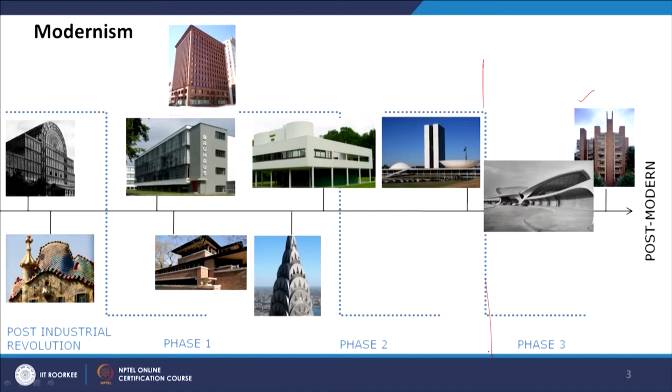So tensile and shell structures, brutalism, and metabolism are all post-World War architecture styles, starting from the 1950s to the 70s.

During the World War there was a crisis in society, both economic and social, and a war was going on. That's why movements like functionalism and other internationalist movements emerged during the war, with their approach to architecture quite different. Post-World War architecture was very different because the socio-cultural context had changed, the financial structure was different, and the requirements were very different.

We have also seen in international tensile and shell structures, Kenzo Tange's work in Japan, and Japan also started coming into the limelight in this post-World War movement.

Before and during the World War, this movement was mostly confined to Europe and USA, but after the post-World War turmoil was overcome by different countries, it started flourishing all over the world, not just in Europe and USA. Why Japan? Because of metabolism in Japan—after World War II, Japan got devastated.

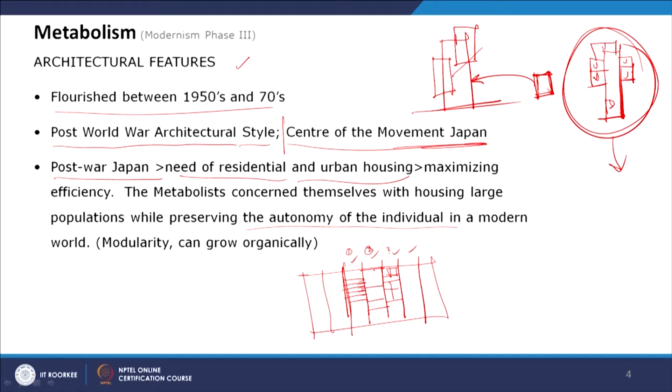Based on the wall area, a user could have many modules arranged in series according to their need—this could go here, that could go there, they could add more or delete a few. The same concept happened in metabolism, as George Nelson described in Tomorrow's House, discussed earlier in the internationalist movement and its corresponding design movement.

This concept which was there at the industrial design level has been translated into the city level and building level. So the same concept of modularity and organic growth can be added, and it can organically grow in a different direction, because the storage wall does not have a fixed dimension. It can be added, and it can also be added on top based on the height of the building. So that was the concept of contemporary storage wall, which we also see in kitchen cabinets designed based on a similar concept.

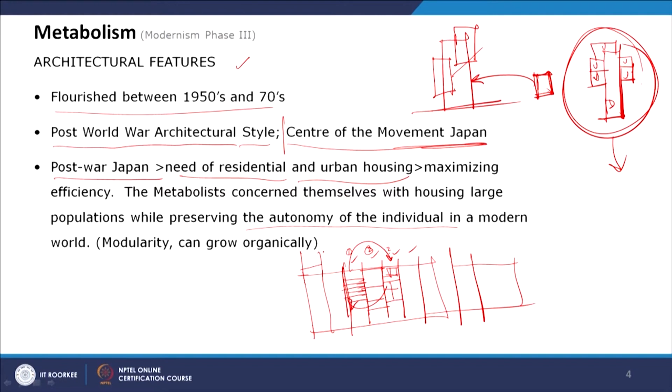So this concept has been translated into architecture by Japanese metabolist architects. The process of metabolism, why did this term metabolism come? Metabolism came from the way living organisms, especially plants, maintain life. The architects got inspired from this process of biological growth.

This concept is called servant and served. In architecture they have divided spaces into two: servant spaces and served spaces. In plants also they have conceptually divided into two spaces. So what happens in the plant? The plant's root and stem are considered the servant spaces.

So what do they serve? They collect nutrition, water, and raw elements from the soil, and then transfer this through the stem to the canopy or body of the plant. The canopy gets all this nutrition, does photosynthesis, and transfers the food nutrition through the total body of the plant. So this is acting as the servicing and transferring element, or the transportation of different elements.

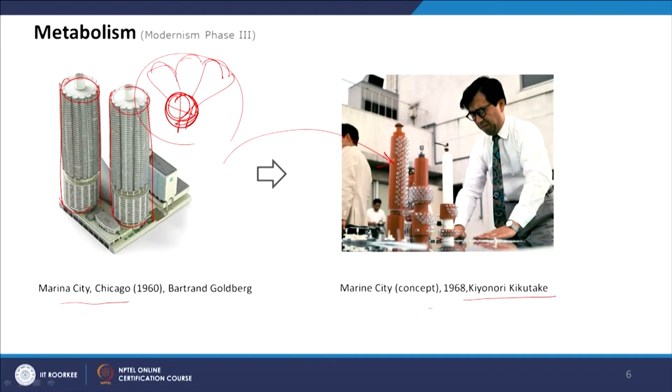The same concept was translated here, and what he is doing in Marine City is more exaggerated, because in some areas there was a punctuation and you see this service core, and from outside these rooms will be added. So sometimes only the service core is visible and the room will be added.

If there is more need, the room will be added over here as well, and it can grow. These cities are connected with this skyline, so you can see this service core is connected to service core. That's why there's a punctuation.

Also this service core, or this horizontal member, will be visually seen from outside, and many times the service core will be just without the cladding. That's why the servant and served spaces will be interlocked with each other through the service cores.

Now based on the need of the user, all these elements are modular, so this can be conceptualized as a modular unit, and then can be joined, or it can also be removed.

But in Marina City this concept was not there, they could not join this way, this modular concept was not there, because Marina City is coming from a totally visual perspective of creating cylinders. But Marine City is coming from a concept of metabolism, where services will be designed, and then served spaces will be fitted into according to the modular need.

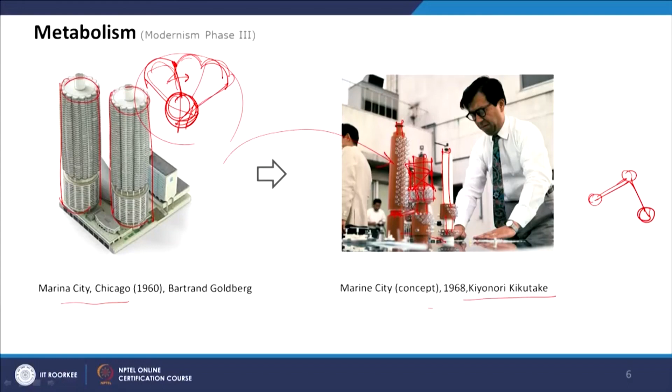So he is using these modular elements to create different change, totally based on the user's requirement. When the user feels like creating more, there is a need from the user side, it will be created. So this is not a fixed design, it can be added, it can be subtracted, and this is dynamic. There was a conceptual difference between these two, but the concept came from Marina City.

From the plan, it looks like this is floating on water, and these service cores are designed, and this service core creates a common space, and these neighborhood levels can be joined with many other neighborhoods, and it can create a city, and it can grow.

This is not just one module where there are services. If you consider this, the servant and served is different. In this module, servant is the service core, and served spaces are the modules around this. So here only the service core is visible.

Now if you consider this, the servant space is this, and these are the modules. So modularity is changing - here the modularity is the smaller apartments, and here the modular unit is one or two floating platforms. These are the modules, and now you add more modules. You can add another module over here, or you can subtract one module from here, and it can grow organically.

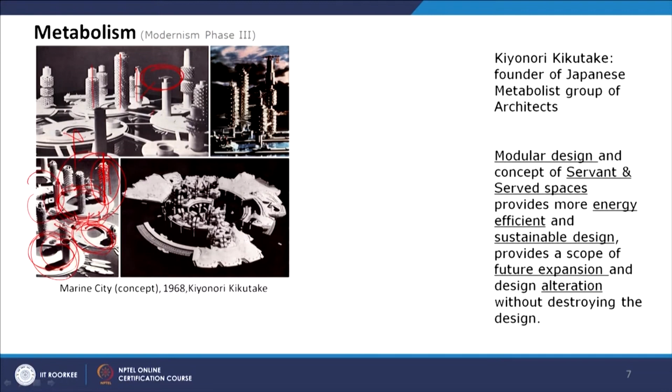So this is modularity added in a different concept. So totally in this city it will look like this, and many other rows can be added. So this is a fluid design.

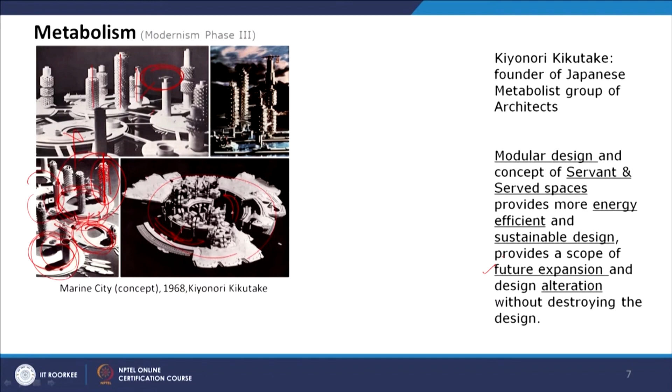Kiyonori Kikutake is also the founder of the Japanese Metabolism group of architects. He is one of the pioneers, and the modular design and concept of served spaces provides more energy efficiency, because there was no requirement to change the services, since that will be designed first, and this is more sustainable because you don't need to demolish the building, you just change the served spaces according to the need of the user. Future expansion is very easy, and the design concept evolved from the future perspective of expansion as well as alteration without destroying the design.

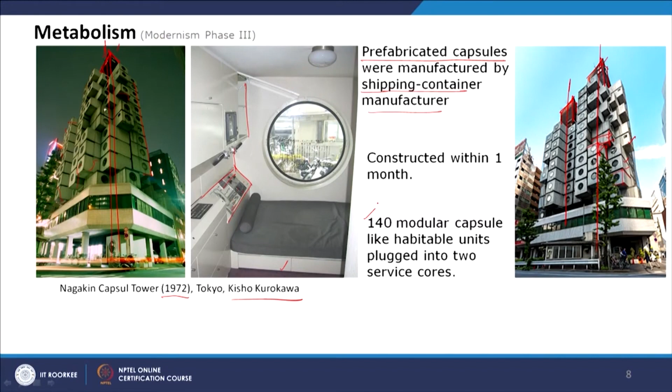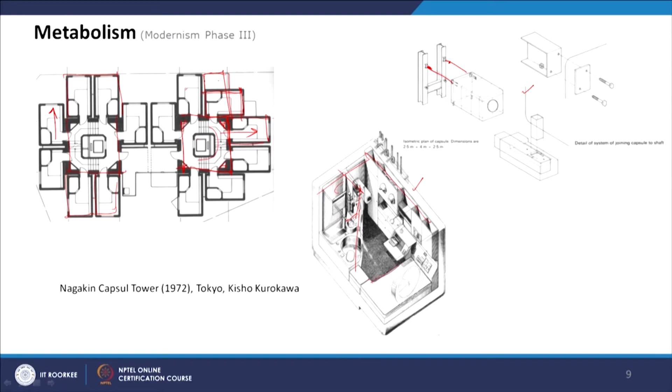The way of adding the module is shown here. This is designed, as we were saying, by a shipping container manufacturer, and it can be snap-fitted into the service core. This is one element of the design, and you can see how much industrial design level treatment was there within the building. The toilet also has a lot of facility in a very small space, and this living area is totally imbibed with the combination of industrial design and architecture.

Another example at a little larger scale is the Yamanashi Press and Broadcasting Center, designed in 1961 at Kofu, again in Japan, by Kenzo Tange himself. Here there are office spaces of 3 different companies, and companies' needs can also change - a company might want to increase their office spaces, or might also sell their office spaces.

And that's why there's a dynamic use, need of requirement was catered to. And then there is a common service core which has 16 reinforced concrete 5-meter dia cores, which contain the toilets, elevators and staircases, which are all servant spaces.

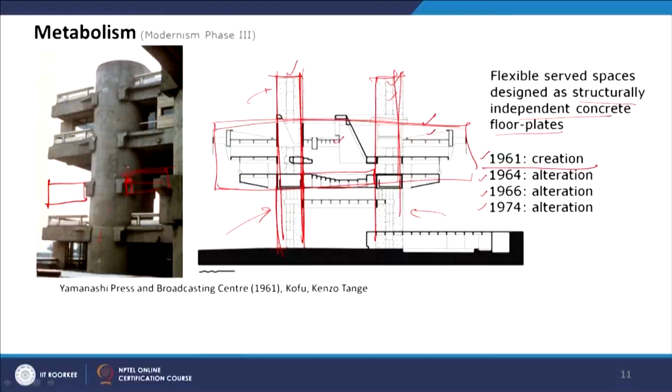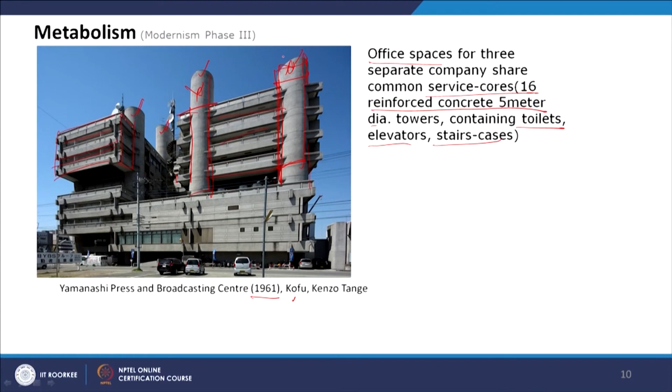So that was also happening in the Yamanashi Press Center. The servant spaces look visually robust, and you don't see any fenestration from here, but here it's like smaller plates with a lot of vertical lines, and they are hanging, looking like they're floating and just hanging from the served spaces. So that looks very lightweight.

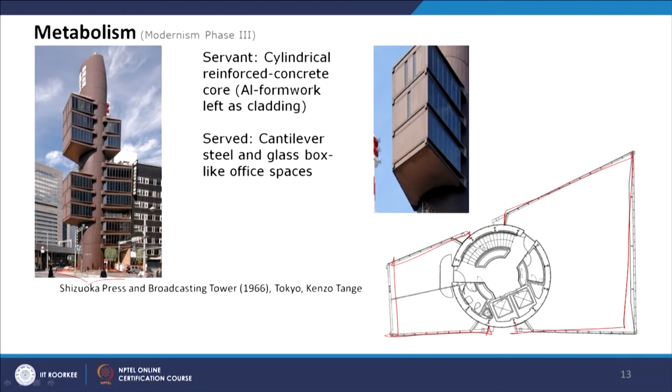That was also the need of Japan—within a very small space, the infrastructure had to be developed. That's why they started blending industrial design and architecture, which we have seen in the Nakagin Capsule Tower. And that's why they could not go for traditional construction. They had to think differently, and went to a shipping container manufacturer and started designing the building with them.

So another example of metabolism is by the famous architect Louis I. Kahn in Richard Medical Lab in Pennsylvania. This image we were showing in the timeline.

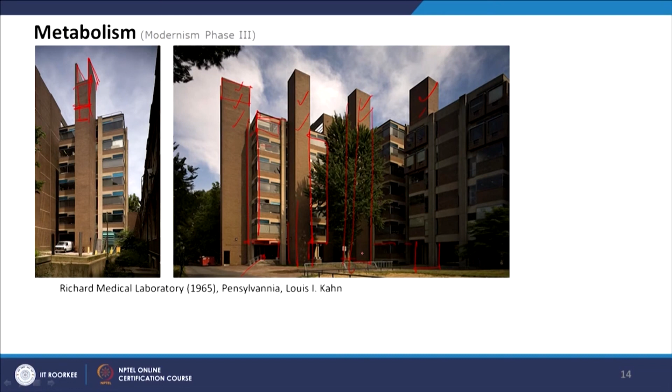So this is a breakthrough building for Kahn, and this design saw the first clear articulation of servant spaces and served spaces, designed by Louis I. Kahn. This has been connoted by Robert McCarter, who said that this is one of the important buildings of the metabolist era. So servant spaces are the independent structures, shafts for ventilation as well as stairways, and these shafts are also for ventilation.

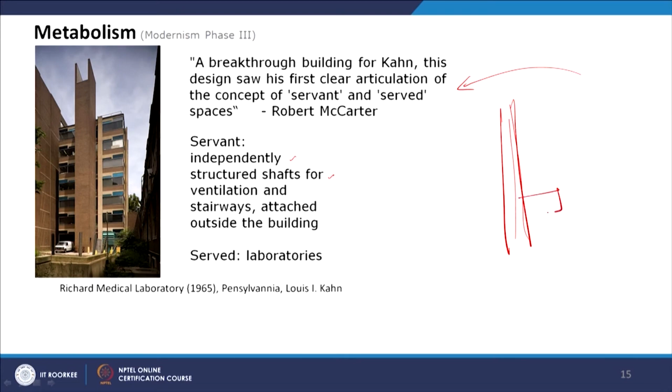So there is a stack effect - if the wind goes from top and there is a void from this room, because of this motion of the wind, due to the Venturi effect, there will be a decrease of wind pressure. Because of the decrease of wind pressure, this wind will be sucked from this void, and from this room all this wind will automatically flow, and the ventilation will be easy. Without this, the mechanical load and electrical load for ventilation will be more.

So it happens automatically if the wind flows from top - we know that the velocity of the wind on top is much higher than at the ground, because at ground level there are a lot of barriers and trees. On top the wind velocity is much more, so if the velocity increases, the pressure decreases, and it will suck the wind from these rooms. That is also a servant space, because this is serving the building for cooling and ventilation instead of just supplying electricity. This is another way of services, so that is also added as a servant space, which is seen from outside.

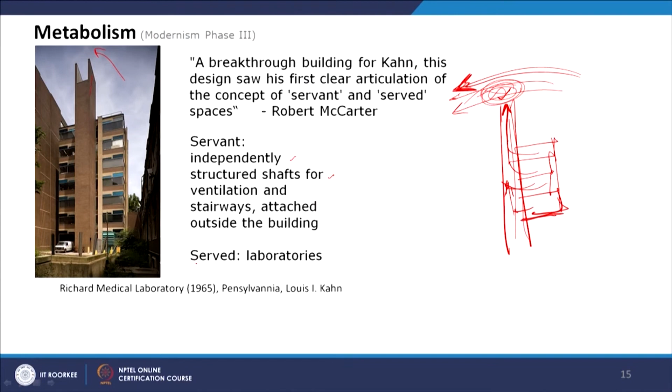And served spaces are the laboratory, because there is a lab, and the laboratory spaces and classrooms and other elements were served spaces.

So here if we look, all these are the air intake ducts which will be visible from outside. This is a staircase tower, and these are the staircase towers, and this is the services tower for plumbing and electricity lines. All these elements are added around the building, and only this is the served space, with services around the facade, and that creates the visual of this building.

And from outside we see more of the services, because volume-wise the servant spaces are much lesser - only these are the volume of the servant spaces. So that creates the services spaces - the laboratory areas were much more volume-wise, but servant spaces were covering the served spaces. That's why we are seeing the servant spaces around the building.

So from outside all the servant spaces were outside - that was intentionally kept and shown from outside, so that the servant spaces are used as a visual element. Otherwise in the previous connotation, the servant spaces and the lift lobbies and other things would be inside, so that nobody can see it, and from outside only the served spaces would be visible.

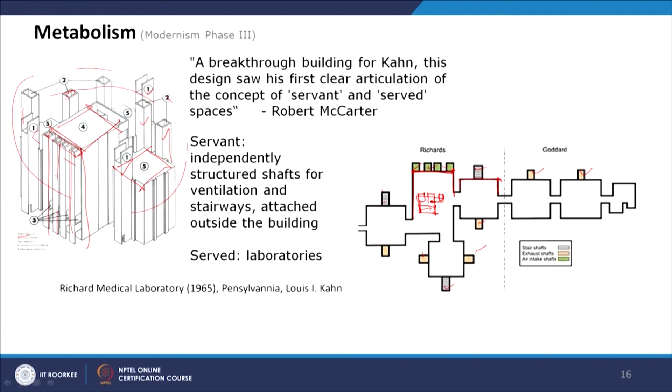And the earlier connotation was that served spaces look beautiful from outside, but staircases and shafts do not look good. But here the metabolist architects broke that connotation, and they used servant spaces as aesthetic elements.

So similarly in the metabolist concept, there was a Tokyo Bay master plan designed in 1960, and there were many concepts designed for the Tokyo Bay master plan.

It was in the same line as the marine city, and on the lagoon there had to be a city which has to be developed. So here in Kenzo Tange's concept, which is a repetitive 9-kilometer module in a linear bay city.

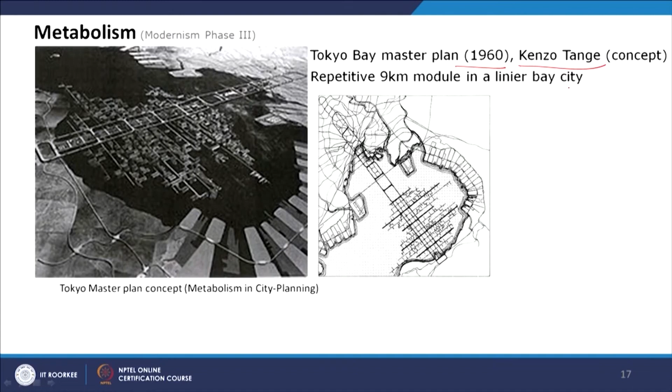This is the line, this is the 9-kilometer module he is designing, and this is the services. All the services, roads, or infrastructure will be in this axis, and that is the servant core, and this will be the served spaces which can grow like algae on the water.

This is coming from the concept of organic metabolism. All the nutrition for this algae will come from here, and it will grow like this on the city. So these service cores will have the infrastructure, and from here it can be added, it can be deleted, and it can grow organically from this particular 9-kilometer module of service core.

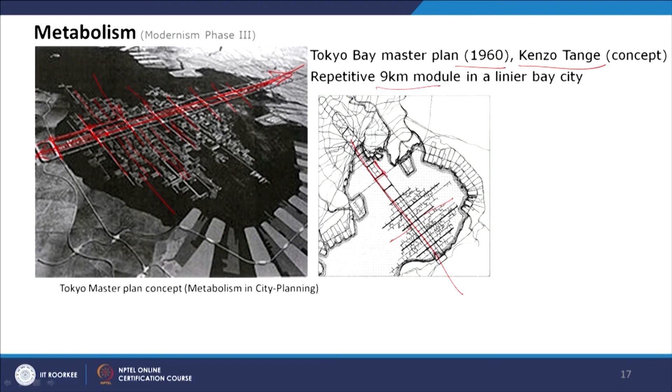Another concept was the marine city itself, designed on the same principle, and another concept designed for city design, because after the destruction of major cities of Japan, they started making the concept of cities which can have a very small footprint and can grow organically with the concept of servant and served. So this is a space city.

This is also just a concept by Kisho Kurokawa. He gave this concept of the space city. This was just a conceptual plan.

There will be these towers which have the service core, and from here in this space the served spaces will grow organically. So this was not on the water, but on the land—the service core will be there, and from there the built forms will grow organically, and they can even merge with two service cores for structural stability, and that's how the city will grow in the sky.

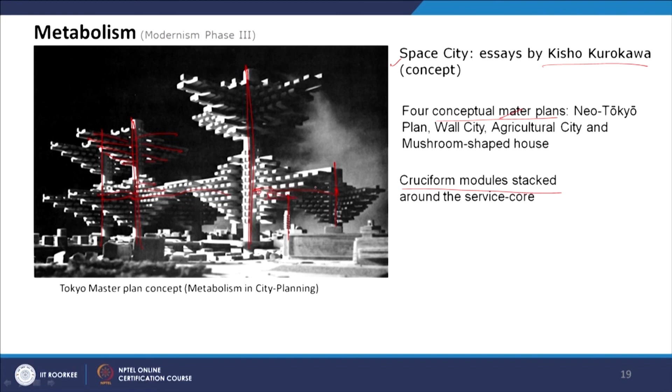So this is like a cruciform module, stacked around, and these modules will be stacked around this service core.

Now we were talking about the World Exposition of 1970 in Osaka, where Kisho Kurokawa and Kikutake designed this pavilion, and Kenzo Tange was given the master plan. So in the pavilion also, this similar concept was designed at a smaller level, just as a pavilion.

So this was the service core, and the pavilions are hung around this service core, and also the concept of modularity was added in the space frame of this service core in some of the pavilions.

The pavilion had the pure concept of metabolism, where around this service core—which has the vertical lift and other staircases—the served spaces were there, and the modular concept was also added in some of the pavilions, where it looks like an extraterrestrial futuristic space frame that can grow in any direction. So it's not a fixed particular form like the monolithic and tensile shells, where there is a particular perceivable form.

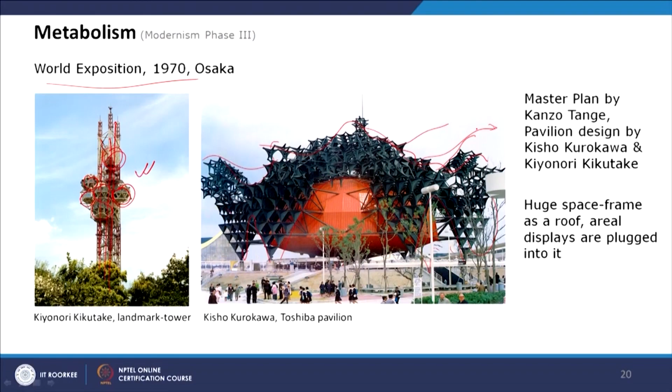So it looks like it can grow organically in any direction. That concept of metabolism was there in this pavilion, but the servant-served spaces concept was not fully there. So the impact of metabolism got carried forward in later phases of architectural design, in high-tech architecture, within the postmodern movement.

We'll discuss that when we discuss postmodernism. So here in the Pompidou Center, a high-tech design from 1977, right at the verge of the emergence of postmodernism, designed by Renzo Piano and Richard Rogers in Paris.

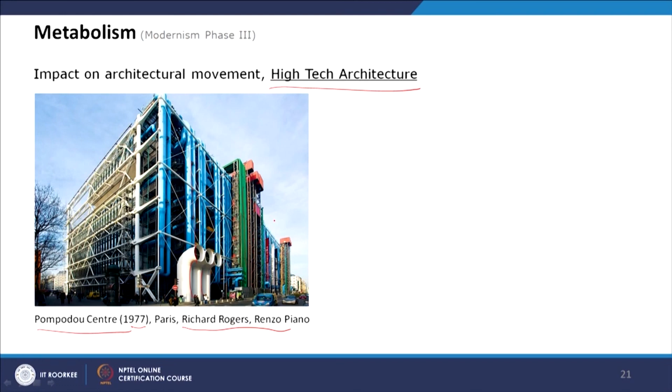All the functional elements are within the building, but from outside, all you see on the building facade is the services of the building. All the services and pipelines have different colors, and different pipelines are visible from the outside, and that becomes the aesthetics and envelope of the building. So servant spaces' aesthetics becomes important in this building.

Similarly, in another building in London, the Lloyd's building, Richard Rogers—the same architect who designed Pompidou Center with Renzo Piano—used the same concept, and this falls under high-tech architecture. All the services and spaces like staircases, lift rooms, and pipelines are visible from outside, and that creates the aesthetics and style of this building.

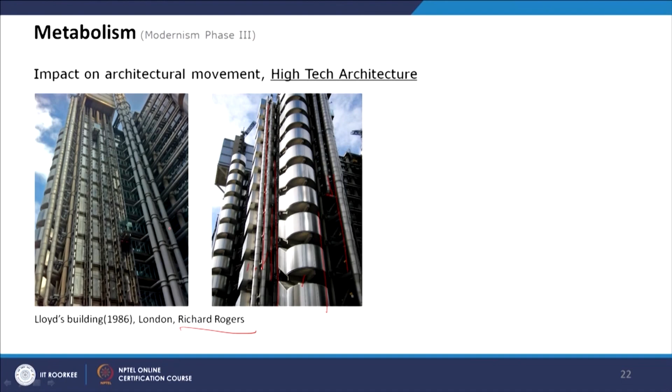Next class we will discuss the neo-brutalist movement, where metabolism and brutalism fuse with each other, with examples of Indian architecture, where many Indian architects, or foreign architects who design in India, have used this particular architectural movement in their designs.